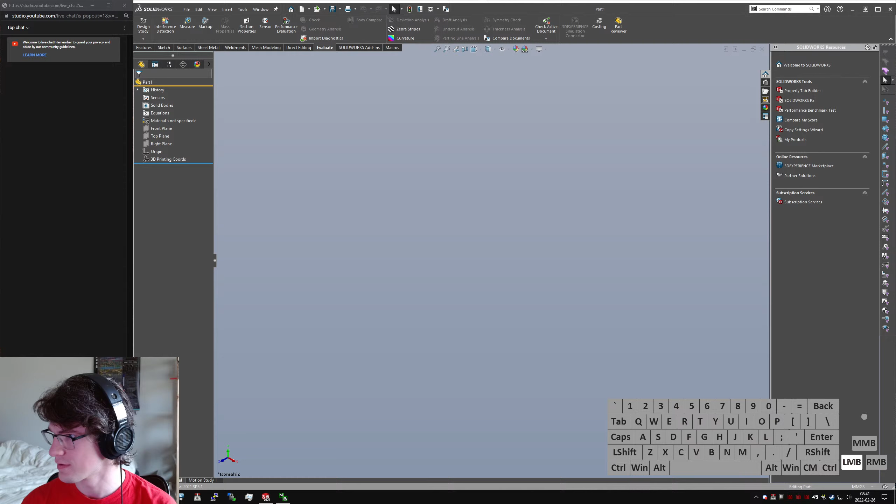Da da da. Monolith challenge. Oh, I can probably just... can I do it just from the browser? That'd be rad. Hey, check it out, cool.

Okay. That looks terrible though, one sec. Oh goodness, properties, here we go. No. Transform, here we go, reset transform. Oh whoops, I goofed the URL. There we go, okay. Transform, edit transform.

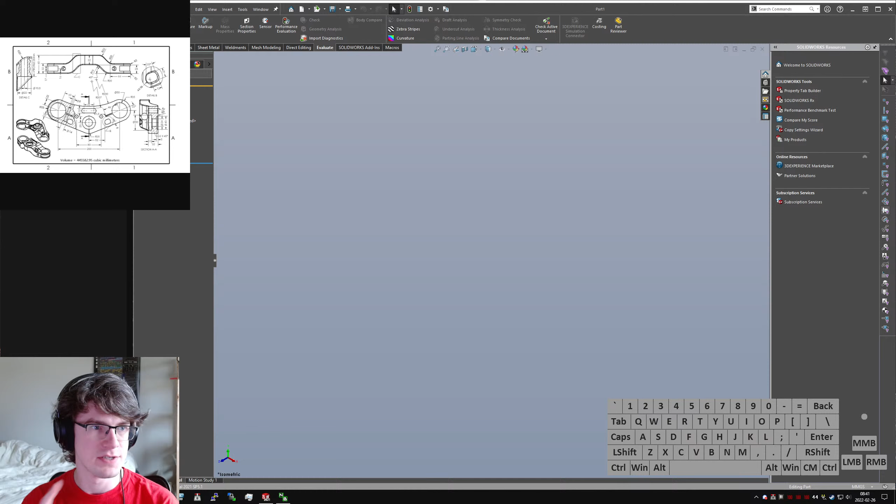Looks good to me. I'll drag that up in the corner there, make that big enough to see. Okay, I should probably get that up in a window for myself so that I can see it.

Okay, so we've got roughly what looks like a motorcycle or some sort of two-wheeled vehicle triple clamp here. I'll pull up some examples just to show you what I mean. It is specifically a structure that sits at the top of your suspension and holds your handlebars, it holds the top of your front forks, it holds all the little bits and pieces and odds and ends that serve as most of the front of the suspension of a motorcycle.

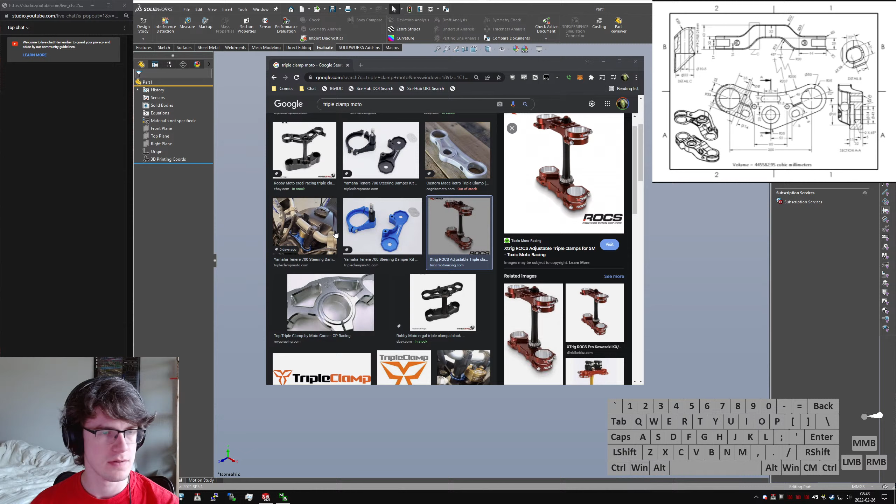I'm pretty sure that's what this structure is, based on sort of the two tubes that it's clamping onto. There's really not anything else it can be. So, I mean, yeah, let's get to it.

So let's see, we've got a... let's just start with the top profile first. We have an overall height, 60 millimeters. I think I want to put my origin probably at the base of that. No, let's put the origin at the top because it's the top surface that we're working with.

Oops, lines do that sometimes. Oh, I must have moved. I've changed my defaults a little bit at work recently, so now none of my shortcuts are in the same spot. But we're just gonna quickly trace out this outer profile. I was kind of hoping it'll give me a 180, but I guess it doesn't want to.

As an example, when you trace off a line vertically and drag off it, Solidworks will give you a point that matches 180, so you can quickly give things that are in the right spot, even if they don't have the relations yet.

Let's add this bottom curve. Oops, select both, Alt-A, make them tangent. They're all goofy, that's fine. And while we don't have relations here yet, that makes it a lot easier to sort of drag things around and make them really work.

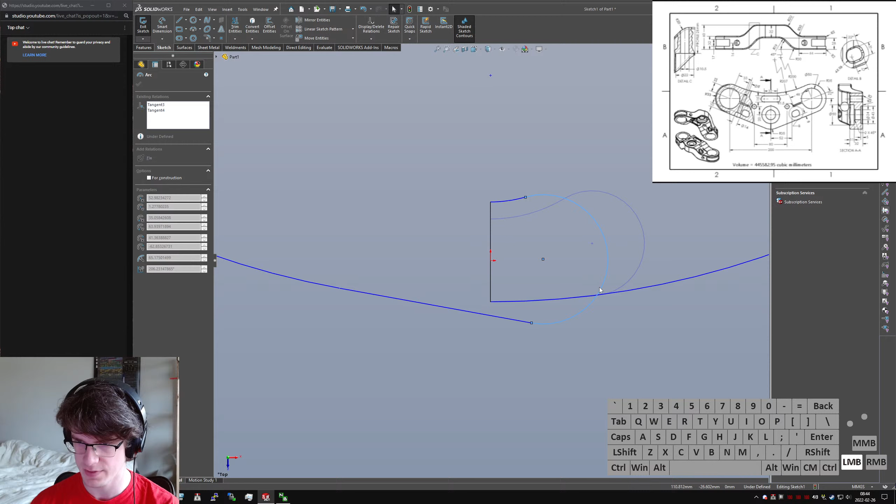So let's get some controls on that. Make that tangent, and is 35 millimeters in radius.

And this guy over here, there isn't actually a dimension on the drawing for this one, which you can suss it out based on how you've got that 22 degrees on the upper right end. Like this 22 degrees right here is like the only...

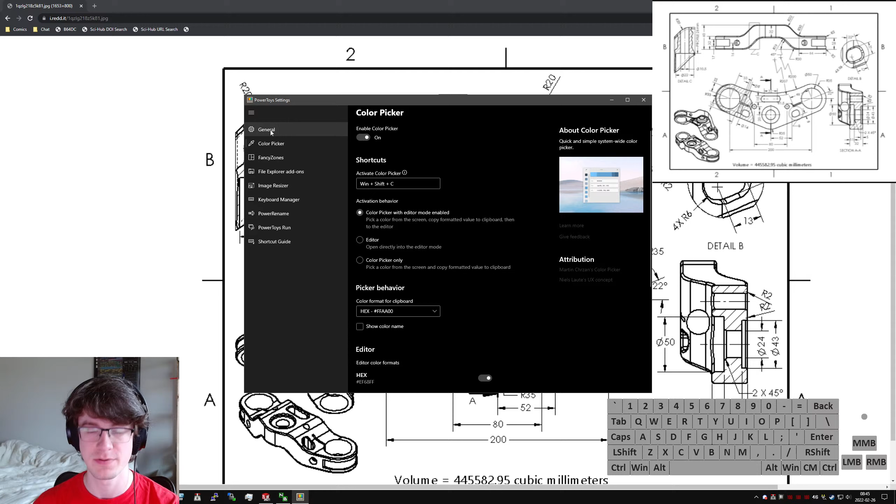Oh hang on, I just realized I have a perfect tool for indicating... oh, where is it? Where's the thing? It's in here somewhere. Power Toys, if you don't know about it, great tool for just doing weird stuff. It's a great pack of little... where is my mouse? Where's my mouse controls? There's a way to get it to, on double click of control...

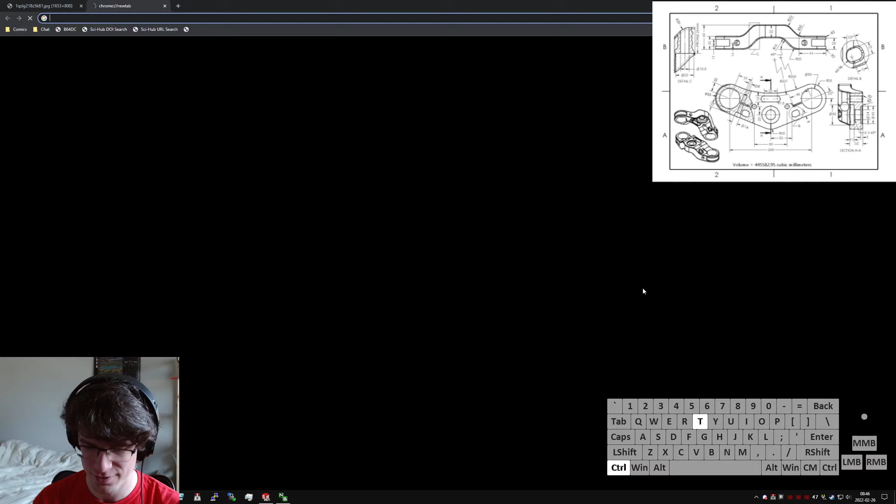Am I on like an old version or something? Yeah wow, I'm on version 35. Okay, that's old enough. I'm not going to do that right now, but... no, actually I should, because it's a really good tool. Power Toys, release page, Power Toys.

Dunk, let's get that out of the way. Downloads, installers, Power Toys. Come on, run, thank you. I agree, yes, install, yes.

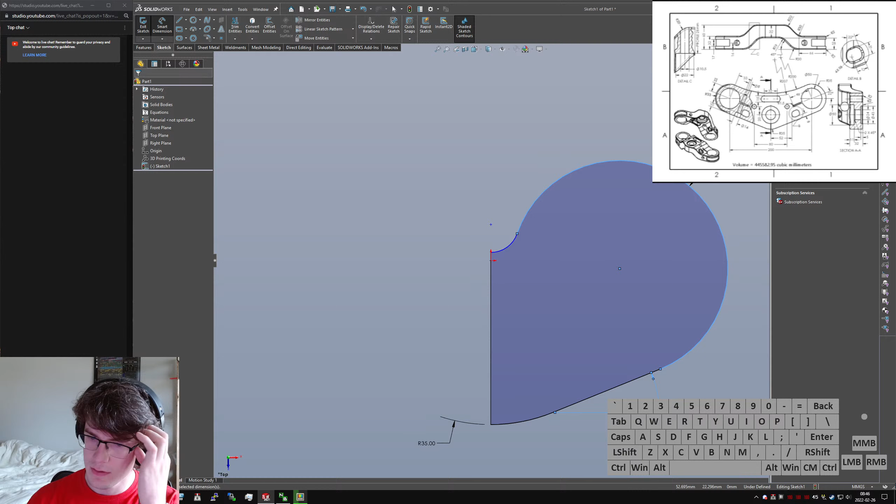In the meantime, we'll keep modeling. So I know this is roughly 22 degrees. I know that the OD of this part, get that out of the way, is also 35. Interesting, I wonder why it's the same on both of them. 35.

And we know we can bring that up here, and this radius up here is 200. Now with this, pick that, pick that, pick that. Right click, drag, symmetrical, part's done. And I just set this to 200 per the drawing. There we go, there's our profile.

I'm not going to fill anything else out yet. That's a lie, I'm going to do the big holes, the big bores, because those are pretty... and I could have added that in the symmetrical as well, but I didn't. Whoops. Have both of those.

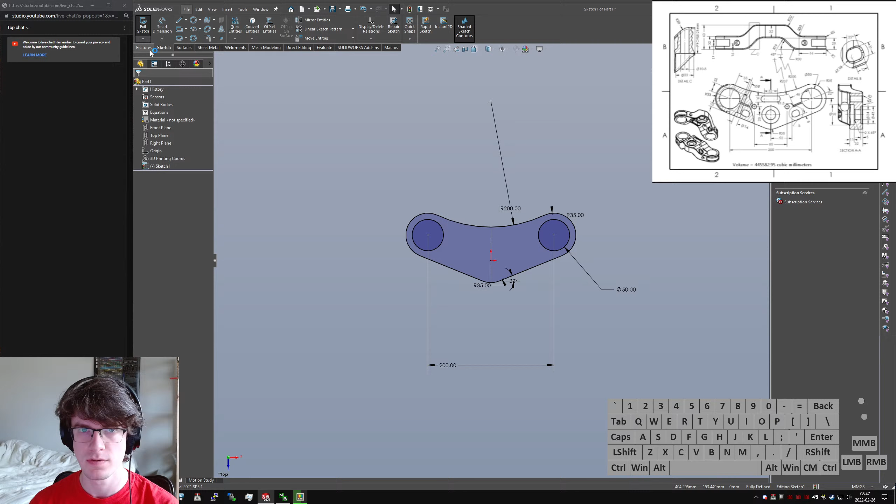Alt Q, features, extruded boss. I'm going to extrude down, so that leaves me with an origin that's at the top center face. Per the drawing of 60 mils thickness, put that down. Cool, there's our basic shape. Power Toys is still updating. Let's do an extruded cut from the front now.

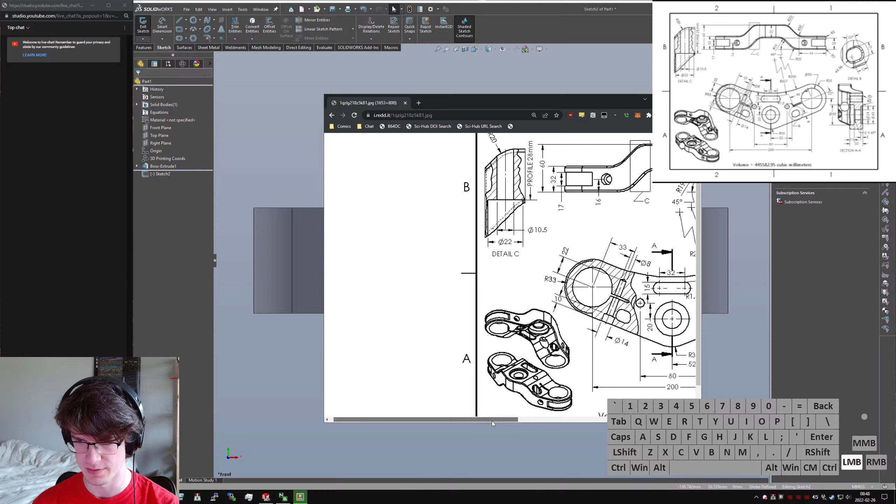Because that's sort of the next major thing we need to start cutting away the profile, is getting rid of this mass here. Which leaves me in a bit of a conundrum, because I'm not actually sure how all of this is defined. This isn't super clear.

30, 30, 20, 19, okay. 28 millimeters, okay. I think this edge starts at the 66 millimeter point. But if it doesn't, I've got no idea. It looks like it might also be 32 millimeters thickness, and we'll just double check that at some point.

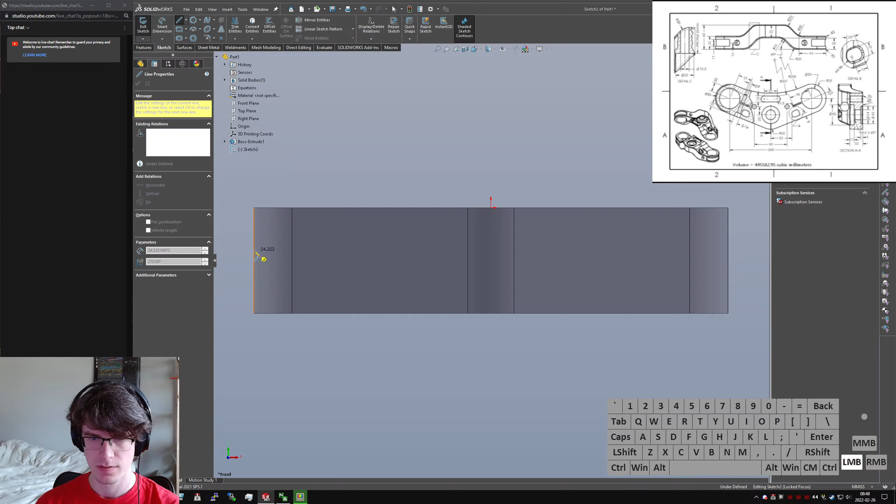I kind of want to try the new open edge cuts, because I don't do that very often. We'll do this again with the symmetrical tool. Whoops, a whole bunch of things.

Okay, 45 degrees, and it's not indicated on the top, which means it's probably parallel on both. 45. Is Power Toys done yet?

Yes, it is done. Is it running the new version now? It is! Check it out. Mouse utilities. Find my mouse. Yeah, there we go. Now get a little mouse highlight. Awesome. Okay, so now I can indicate stuff clearly.

This 22 here, and I wish they wouldn't add a white overlay, because it clearly does put a little bit of white over it, but eh. Oh, maybe I can customize that. I totally bet I can customize that.

Mouse utilities, find my mouse appearance and behavior, spotlight color, spotlight radius. Let's do like 200 because I need a little bigger for big screen. Overlay opacity. Ah, but you can't make it. Ah, hue saturation value. You can't make it transparent. No. That's annoying.

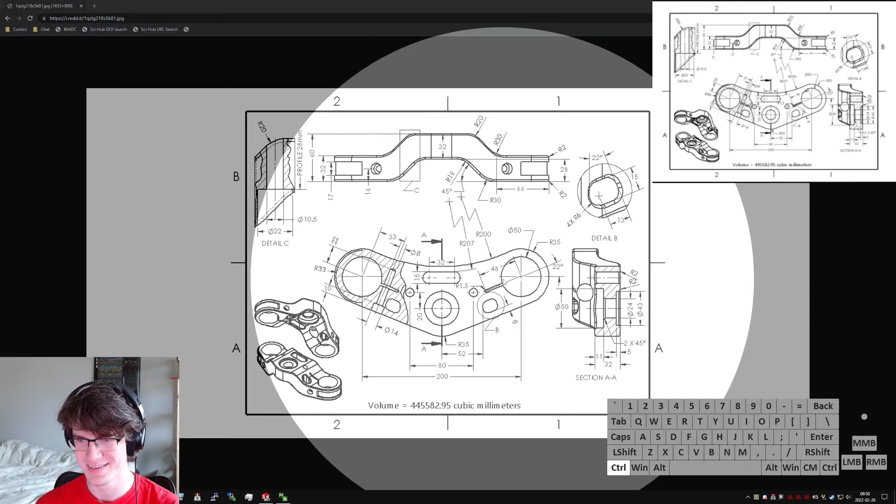Okay. Oh well. I'll just put this up here in the middle. Well, can I, like, Alt-Tab efficiently? We'll see if I can Alt-Tab efficiently.

Okay, so 45. We know that we've got 66 millimeters length here. Looks like these are parallel, probably. Off the top surface, we are 32 millimeters. Off the bottom surface, that's a little sketchy. I'm going to add a line there.

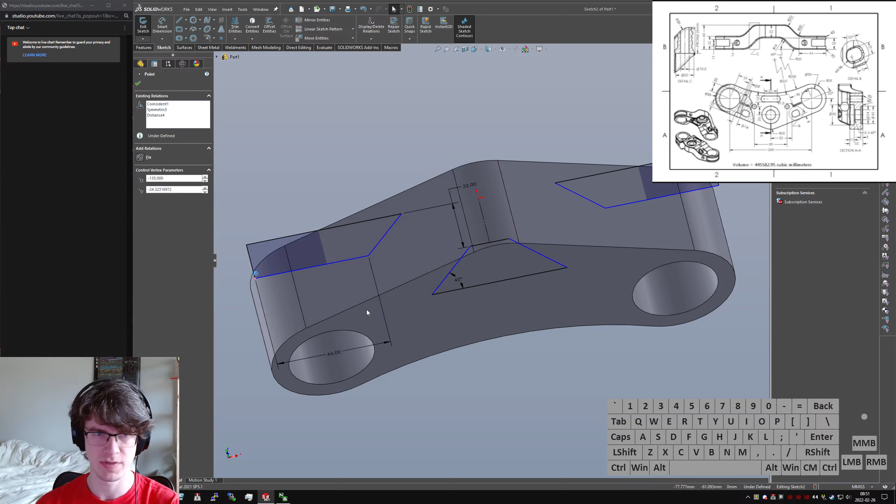It's important to control your relations as well. This is coincident with that line, which is a little iffy, but, oh, better yet, I can tell it to be coincident with that face, and that way it'll always be cutting off from the bottom rather than having to specifically refer to that line. This one is also difficult because I think it's coincident with like a non-existent edge that doesn't really exist. And this one is coincident with this edge, which I don't want. I want it to be coincident with this.

Okay, that's probably good enough for now. Add this 32 thickness here. And then we don't really have a good control for how thick this is. But if I set this to 32, I would... No, dang it.

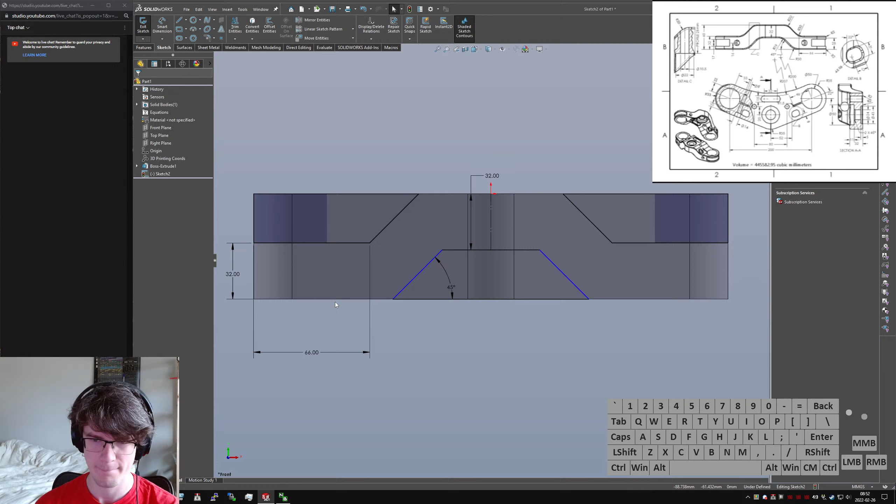Oh, no, I forgot. It's because there's a fillet, too. I'd bet almost anything that this is also 32 millimeters thick. It's sort of the only one that makes sense. So we'll do an extruded cut through all in both directions because we're cutting from, if we look at where the sketch is, it's on the front plane.

Which is going to have to cut in both directions to get all the material off. So now we'll do some fillets to get our profile because those fillets are actually important to exist beforehand, I think. Well, maybe not.

Let's do these guys next, these little cutouts. So we've got 48 millimeter depth from the center of that bore. And looks like it's right on center. And it's 1.5 millimeter radius, so 3 millimeters width. I probably would have dimensioned the width, I think, even with the radius. Yeah.

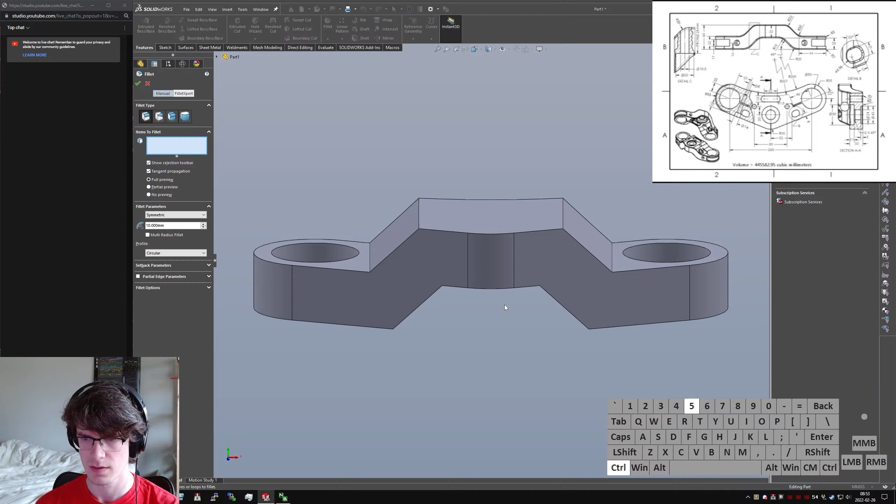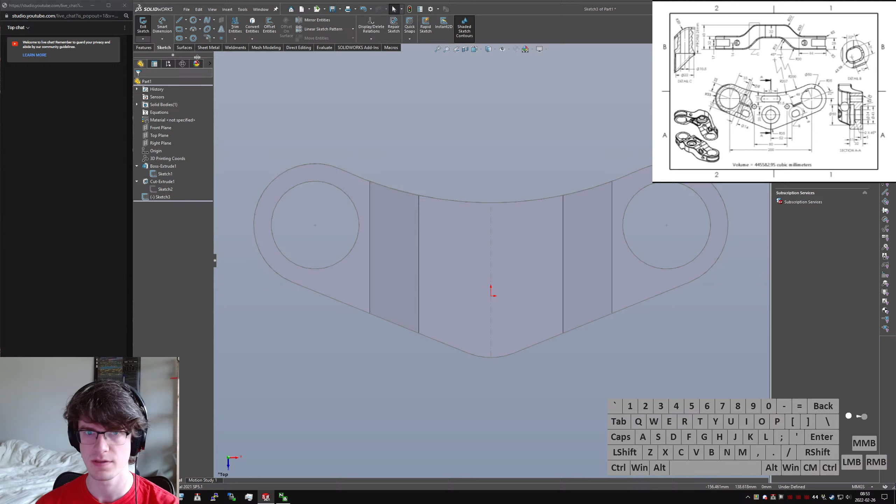Let's do no fillets yet. Oh, I didn't change this to be extruded cuts yet. I have a signal message to myself with all my new shortcuts, but I haven't changed them here yet. Let's do top plane. And I'm just going to do this with... ooh, I should reference the sketch instead, actually, since that's sort of the critical defining feature here.

I can make this not collinear, sorry, parallel. Make that 48 millimeters long. And just from a design intent perspective, I would always say that as I'm defining a gap, I'm not defining the radius on the other end. The radius is almost even incidental, except for stress relief in there, but it's still under compression because of the way the structure is designed, so not really that big a deal.

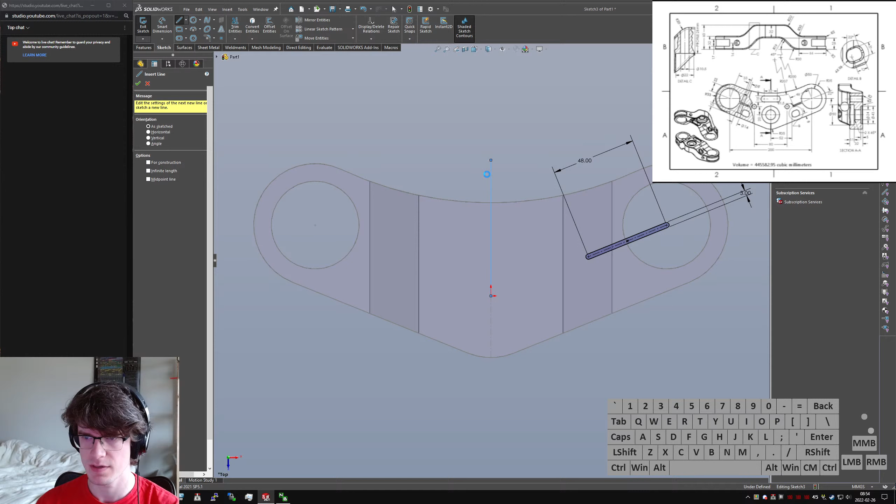I'll do the same thing with mirroring. I'm pretty sure it'll let me mirror this easily. Yes. Technically there's a construction line as part of the slot, but the way Solidworks treats slot entities, it's one contiguous thing, and so you can still select one construction line and let you mirror things. So we will do an extruded cut

through all. And if I do this first, then it also gives me the opportunity to look at, let's see, this bore is what we care about next. Does it say, yeah, 16 millimeters up from the base, 33 over from the end. And that's got to be tapped. So we will do a hole wizard.

Because this part is symmetrical across X, I'm going to use a 3D sketch. I'll do it once, do a stack up of one, do all the features I need, and then do one mirror at the end, so I don't have a whole bunch of separate mirror features with their own mirror silliness.

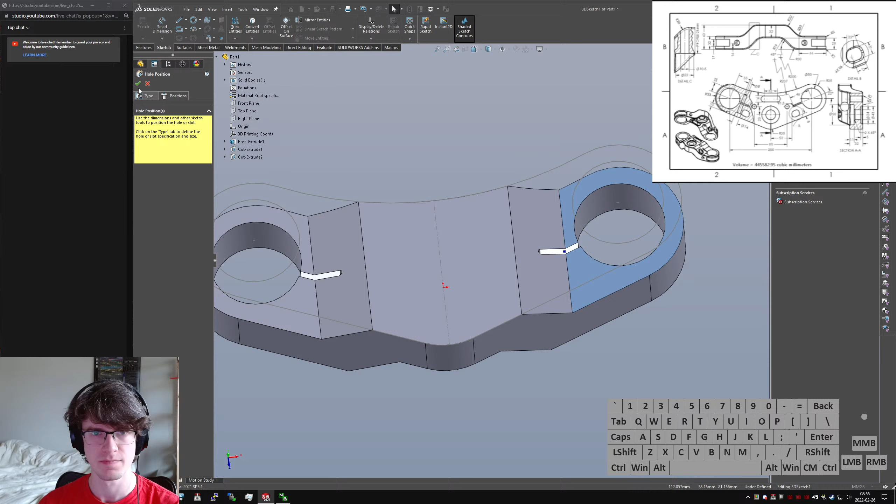So type is threaded. What's the clearance? 8 millimeters. Quick check on M8 socket cap screw dimensions... images... M8, head diameter 13. So that is definitely designed for an M8, which is kind of a big clamp bolt for these. They only take on the order of 10 or 20 Newton meters for clamp bolts, or pinch bolts as they're usually called.

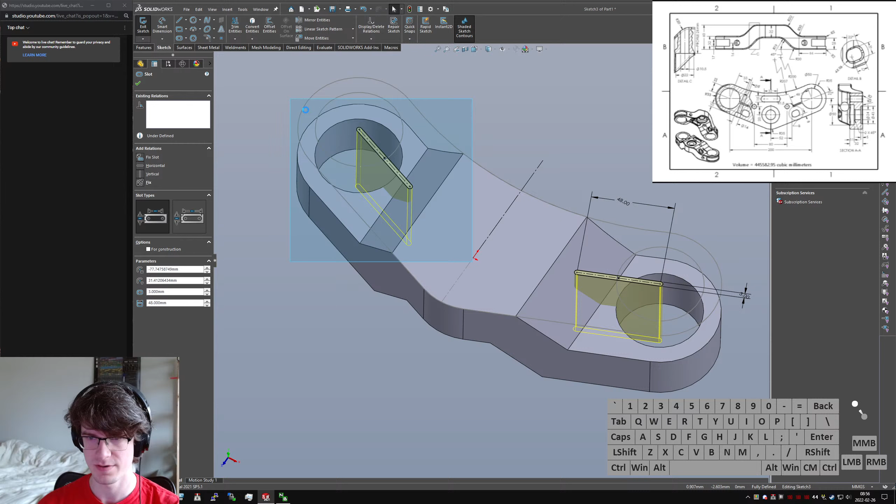ANSI Metric. Straight bottoming tapped hole, not up to next, but merely blind. And I am not going to do this—oh hang on, no wait a minute, I need to do this for the drawing. I can't just engineer this correctly. I'll get rid of this while I'm here too, I'll mirror everything later.

Ooh, I do need the fillets though, because otherwise I have to fillet that twice. So we'll do that before this first cut extrude, or rather right after it. So we've got 30, 30, 20, 19. Okay, at that sketch while we're up here. We'll do a multi-radius fillet, which should let me add all these fillet features in one go—which isn't the most necessary thing, but whoops, wasn't done adding fillets yet.

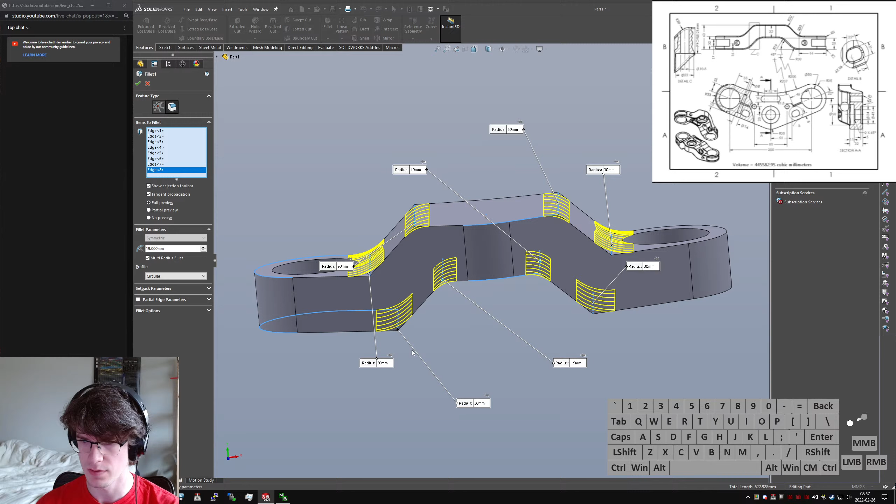Nope, not that. Let's see, 30, 30—no, this underneath one is 19. This top one is 20. Is that right? 19, 19, 20, 20, 30, 30, 30, 30. Cool, okay, fillets, cool beans.

Oop, I didn't do keep surface. We can check his model as well to make sure that's the case. Yeah, that's one contiguous surface, so it doesn't change there—it would show hidden lines in the drawing if it did. So we can go down to fillet options and say keep surface. There we go, straight lines. Now our cut extrude cuts through just fine.

And next up is the hole. We are dealing with a counterbore to a depth of 22 millimeters past that, and that's 35, so overall depth is... oh, I'm gonna have to do this with a custom hole, or tell it to put a counterbore at the front—it's the easiest way. Naturally I'd want to design this with SolidWorks tools for saying make this a hole with threads in it so the callouts come out right, but... yeah. 22 from a 35 outer radius is going to be 57.

I almost want to do advanced hole just because that'd be easier, but no shortcuts. End condition, we're dealing with where that cuts off. Not hex bolt, but socketed cap screw, M8, normal, show custom sizing. We want this to be... well, I have to do it to those dimensions. And that goes to 10 depth, which is a little more than usual. He doesn't dimension that endpoint—I mean we can assume it's a nominal 118 because he was probably using SolidWorks. Probably using SolidWorks, but depth is going to be 55.

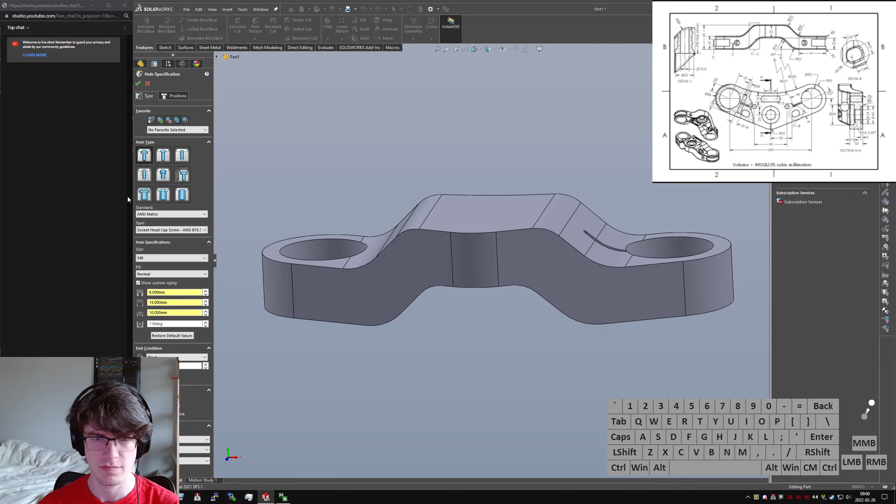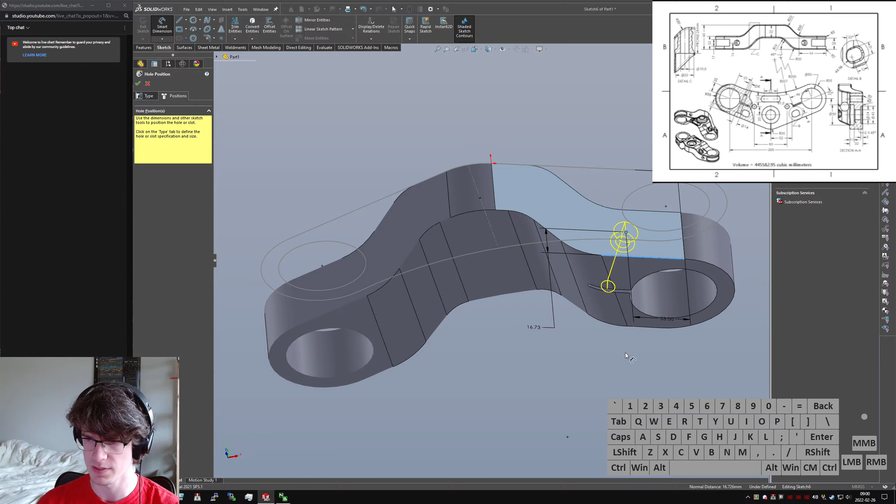Positions—just pop that guy here. Do I want to use that reference edge? I don't think I do. I think I want to show this sketch, define that relative to... tell you what, let's convert that, make a construction just so we have a reference, and then we can reference the midpoint of it and say 33. And because we cannot reference surfaces in sketches, unfortunately, that'll just have to be 16 for an edge. Not the biggest fan of that, but it is what it is. So now we say okay, and now we're geometrically accurate.

Cool, so next up is—this cutout's going to be really weird when we section that through there. I think I want to do this, let's do this slot next. Or, oh no, I can do...

What is the deal with that hole? What is that hole's deal? Does it ever get a called out radius? It says they're 80 millimeters apart, and it looks like they might get a counterbore or something. Oh, they're not fully dimensioned. No, they don't have the diameter, they don't have, like... I don't think they have a call out.

How long have I been going? 20 minutes?

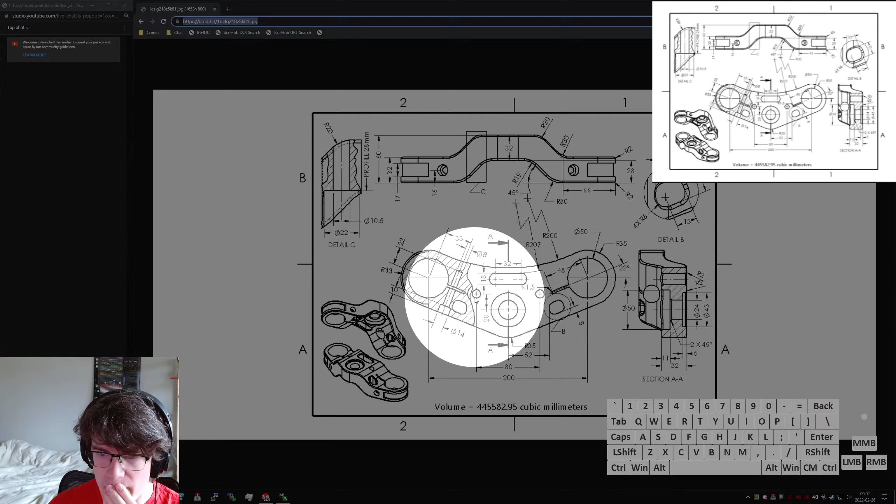So I'm specifically worried about this little hole right here in the center. Those aren't defined, which isn't great. But I said I was going to do it, so.

Let's see, Extruded Cut up next, top plane. I'm going to try and reference this because that's the origin, and that's what matters. I can even hide the solid body. So we've got a vertical line here, perpendicular to that, and we come back down. This is parallel to that.

It's 8 millimeters away. I think it's 8 millimeters away. Is that what the drawing says? Yeah, 8 millimeters, and then 13 to the center of that radius. 22 and 15. Okay, which means we can just leave this vertical.

But it means we need to have the... since this is defined from that edge, we need to have the radii built into the cut section. Oh well.

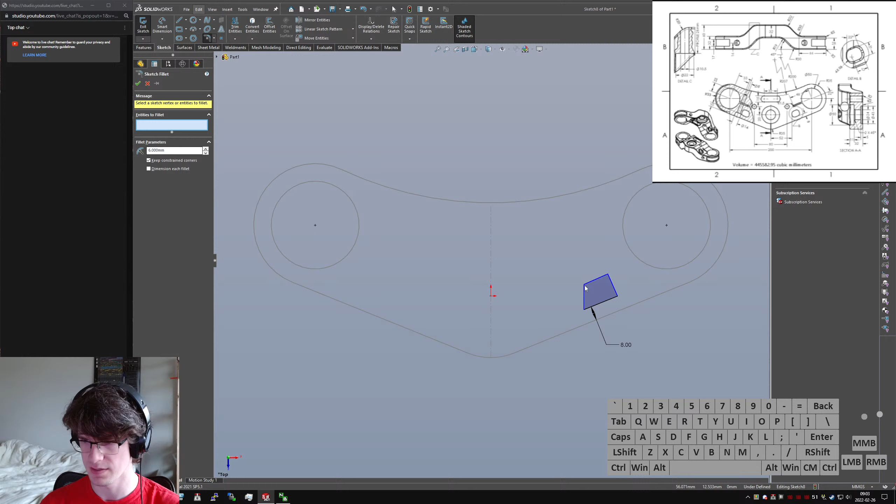We'll remove that and put it on the far side just to get things out of the way. So I think that was 13 and 15.

Ooh, they're not parallel. 15, I think. Looks about right.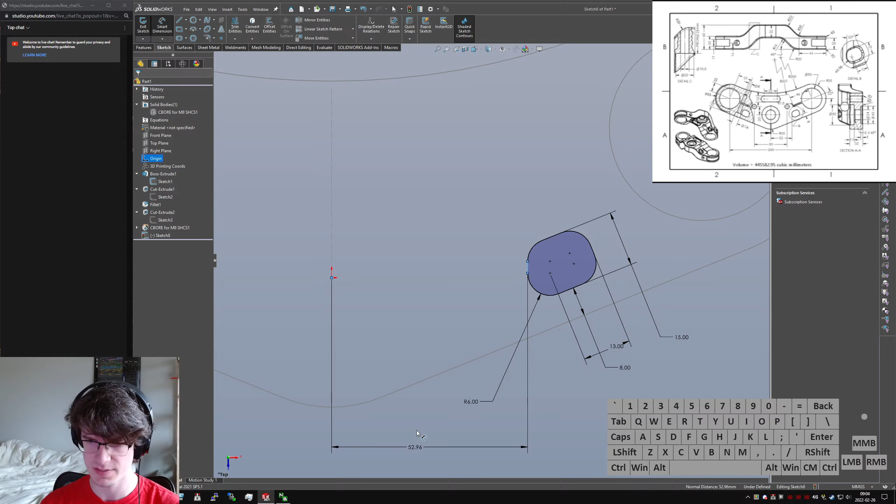So we've got 15, 22 degrees. That's fine. Having this one be perpendicular to the sky puts everything in the right spot. And then we want it to be 52 off center line, so I'll just do that by grabbing the origin. Better than grabbing the sketch wherever possible. You want to limit your external references if you can.

So now we unhide it, say Extruded Cut. I should show off this trick because it's kind of interesting. If you hide a body when you're doing a cut, Solidworks will just assume that it's not there. So if I say up to next, like go all the way through, it'll say the intended cut does not intersect the model. You can control what bodies you're applying cuts to just with visibility in the graphics view, which is handy. It's weird, but handy.

I should save this too, actually. Reddit, Clamp, 2022-02-26.

That's one of the cuts. What else do we need to be mirrorable? Ah, we need this. How does that get clarified?

Okay, 17 millimeter thickness, and 33 millimeters, so... and it's vertically aligned, which is a little strange.

I probably would have aligned it to the... like, instead of having it be vertically aligned, I would have aligned it like this. So that, there we go. I would have aligned it this way so that you minimize the material you're removing and just save weight, or just reduce stiffness on the exterior. On the other hand, this is probably still thicker than it needs to be, so.

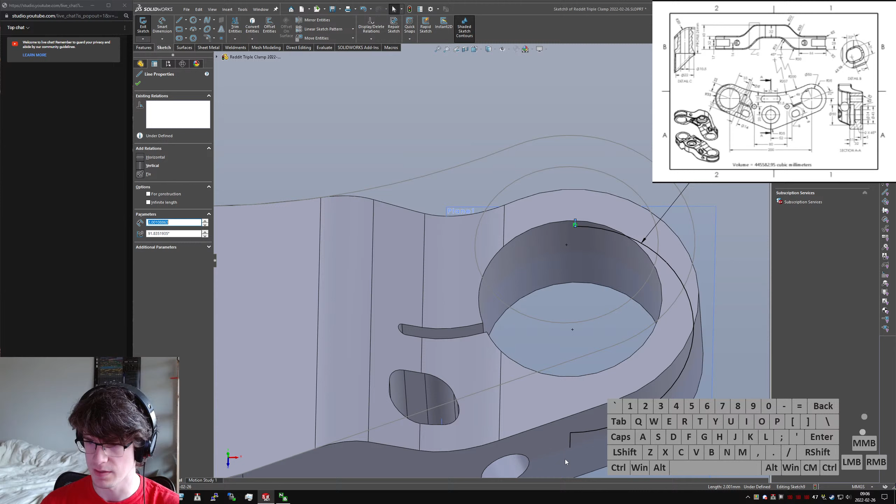Coincident, centric, 33. We'll make this guy, no matter what, collinear.

Features, extruded cut. Whoops, why is that not letting me do... oh, because it's... well, let's just convert this face.

Convert entities, I'll just trim away the rest. Sometimes it does have to just be referenced to the... ooh wait, no, I can convert the sketch instead. I can convert the whole sketch.

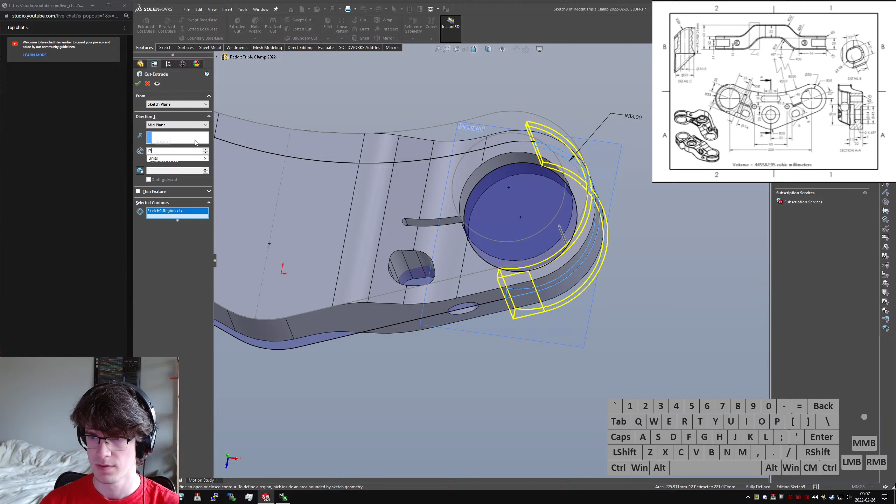And then I can say extruded cut, midplane, selected contours, and then I can pick just that one contour. This is a trick I discovered recently that seems really handy. You just convert the whole sketch and tell it to only care about this contour surrounded by these entities. You don't get any weirdness when you change other entities and it adds or removes things in the sketch. You're just always referencing that section.

So let's, whoops, don't need another sketch there yet. Hide that, hide that. So now I think we're looking at all of the independent features we need on one side, so I'm going to go ahead and mirror those. Go doot, doot, doot, doot. Looks good to me. Say okay.

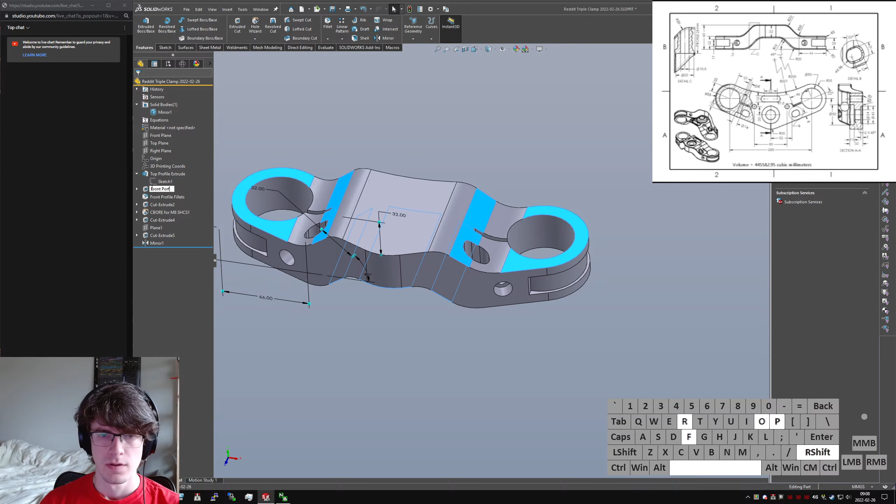Sweet, let's do some quick cleanup and naming. So, profile fillets. Top profile extrude. Front profile cuts. Clamp gap cut.

Right, socketed cap screw, C-bore, hole. We've got the clamp stress - we'll call this the clamp flexure relief.

Because if I'm looking at this model right, when you clamp down on this bolt, you'll want to bend this whole bit inwards, which you've got a lot of material for that little bit of steel to move, assuming this is made of aluminum. It can probably kind of do it, but it's still not how I'd go about it if I was designing a clamping fixture.

And this is the exterior clamp relief cut. And rear clamp features. This one is, whoops, we should name the plane too. This is the clamp midplane.

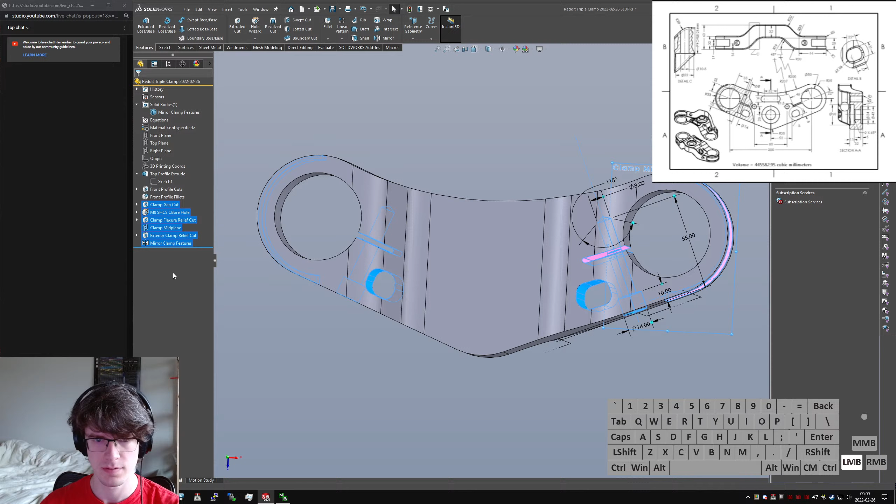Now, clamp features, which successfully grabs everything that's clamp related. I think there's probably some chamfering and things to do later on. Well, I guess maybe not. Maybe it's good as is.

Okay, so now I need a really complicated hole that... oh, those are counterbores from the underside. What?

Oh, hang on, that's totally called out. I'm dumb, goodness. Thank goodness, actually, because I was worried that those holes just weren't described at all.

22 profile, 28 millimeters, so I guess it's just 28 millimeters in the bottom. I can't think of any other way to describe that, so that's what I have to go with. Yeah, that's what this weird edge is right here. That's the counterbore, and since we know we're on center line with this bolt because that 80 millimeter diametric dimension is out, and we know that's 60 millimeters up from the bottom.

We know that we have to have cut through right there, so let's do that. That means one more feature to add to the clamp, which reinforces that it's probably a triple clamp because those bolts would have to go up through the bottom to grab the bottom of your handlebar clamps, or what are they called? Handlebar clamps. Yeah, handlebar clamps, handlebar riser clamps, that's what they look like. Normally they bolt in from the top and you bolt through them, but there's some other styles too. At least on dirt bikes, it's a pretty standard 2-bolt pattern, I think, with M8s.

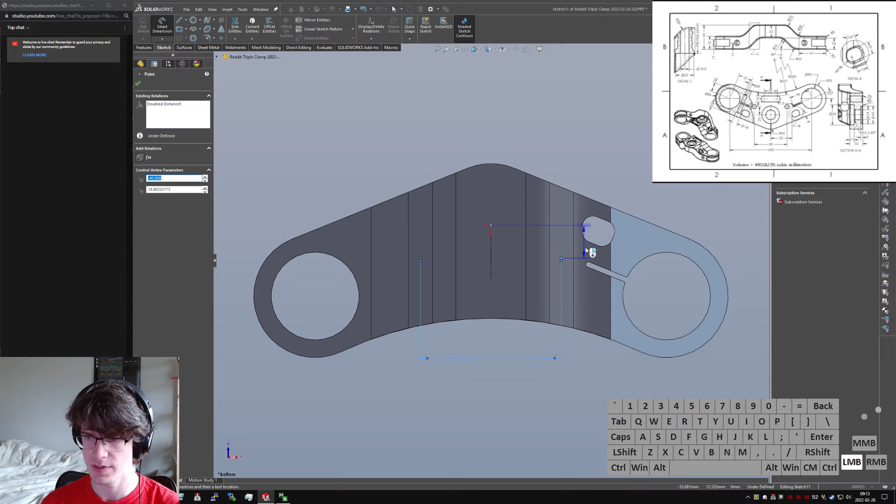And the surface is this one on the bottom. We'll just put it there, bring it over. I'm going to add a line here so that I can give it that... whoops. If I was doing this from a perpendicular view, it would be a lot easier. Make that 80. If you had a center line, you can do things diametrically, which is handy. Add that point, and that point, say 20 mils. I think that's what the drawing gives.

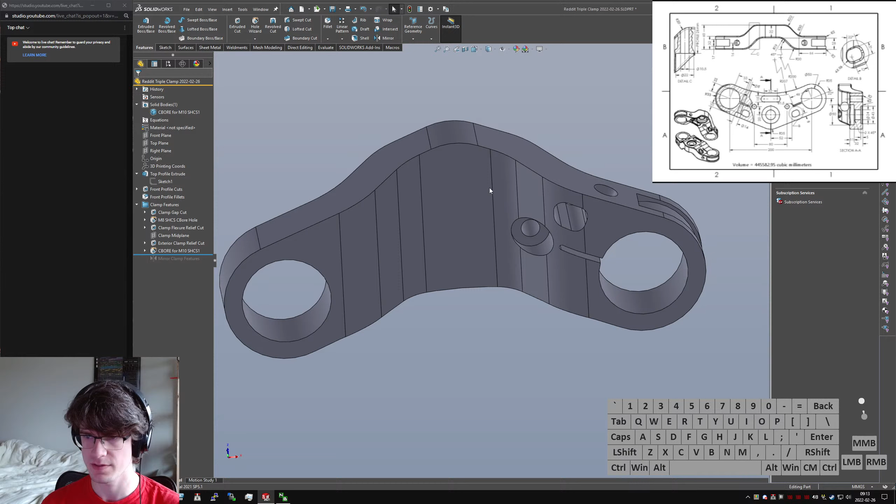Yeah, 20 mils off center, the big guy. And that looks about right, and gives us the right amount of cut through. What's that look like in profile, actually? Let's see... that seems about right, honestly. If I do it the other way around, and say make this 32 in depth, that looks deeper than it is in the drawing. So we'll stick with 28 here.

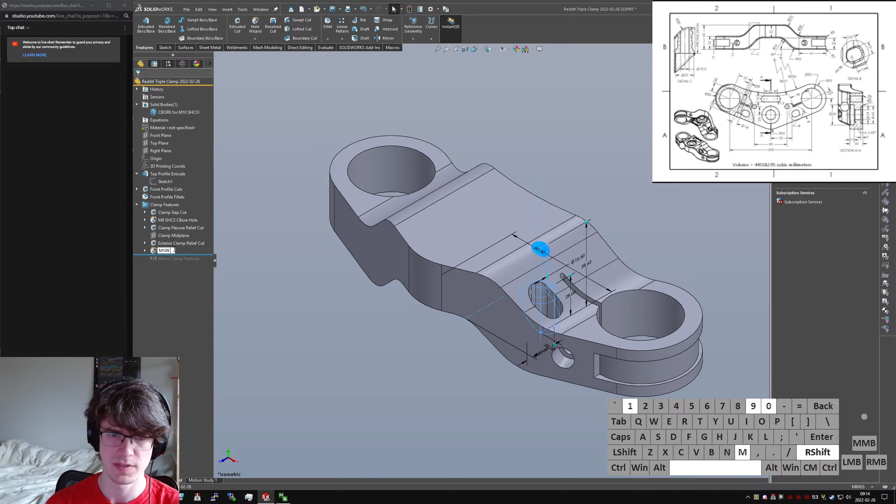Call this the M10 socket head cap screw, underside C-bore hole, and add that to the set of mirrored features. Do a quick save. Looking good so far.

Okay, next up is... oh man, I am not looking forward to this. Oh no, never mind. Did he... is that filleted? What is the deal there? It looks kind of like there's an exterior chamfer on this. But I don't know, there's a lot of specific chamfering that's not really called out. Unless those are radii on the exterior. They are radii on the exterior, and the way I can tell this...

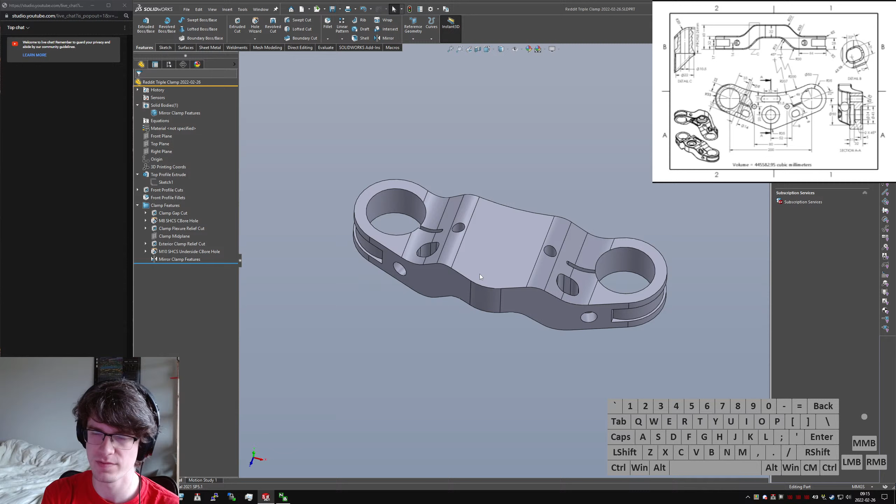Hang on. So we can see in this view that he showed tangent edges, but he didn't in the profile view, probably because it would have looked too busy. Yeah, those have to be fillets. Oh man, that'd be such a pain to machine. You could never have that on a production part. They would have to be chamfers, and you'd have to specify that handwork is okay or something. I mean, you could tell him to CNC it, but with the part designed this way, it's probably designed for something that wants to be kind of cheap, so it's probably done from a casting first, if I had to guess.

We'll have to save all that to the end, that's for later. Let's do this top hole now. So 43, 24, depth is 5, and then 11 on the back side. I think advanced hole is actually the right tool for this for the first time in a long while. I don't really use it all that often because it just isn't something I really need.

Let's see, and add one more. So this is going to be a far side counterbore. And we've got, oh, we don't actually have a chamfer. But it looks like we've got a fillet.

Is it chamfered on the inlet too? But it doesn't show up in the model. Oh, that's chamfered on the bottom backside? Yeah, okay, I guess that's 2 chamfers. It's really hard to tell, that top surface is small.

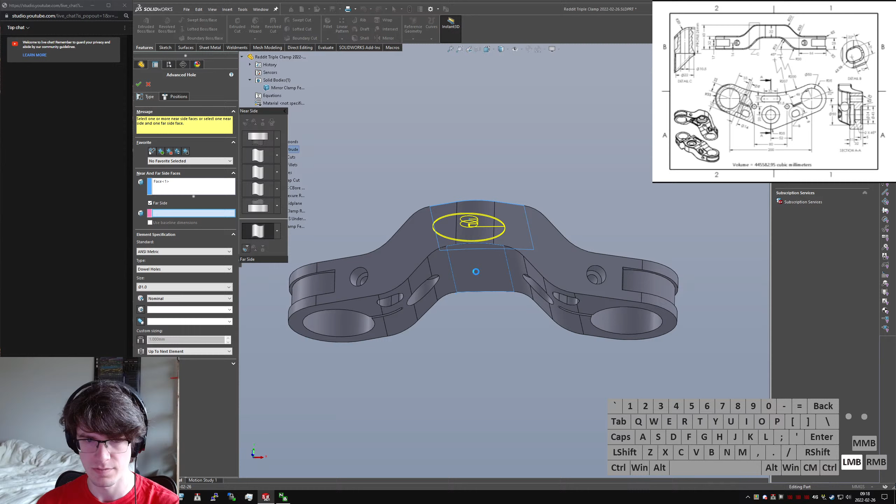Let's see. Okay, so we got a far side, we got a near side and a far side. Top one is going to be asymmetric. Counterbore, I'm just going to custom size it, it's going to be awful. 43 and 5 mil depth.

Oh, hang on, I can remove elements from this. Near side countersink. I'm not going to put a countersink here, and maybe I'll just make this a plain hole. Maybe that's easier, because then I could just specify my custom sizing a little easier. So this is going to be, was it 23 and 5? Or 43 and 5? 43, 5, and 24.

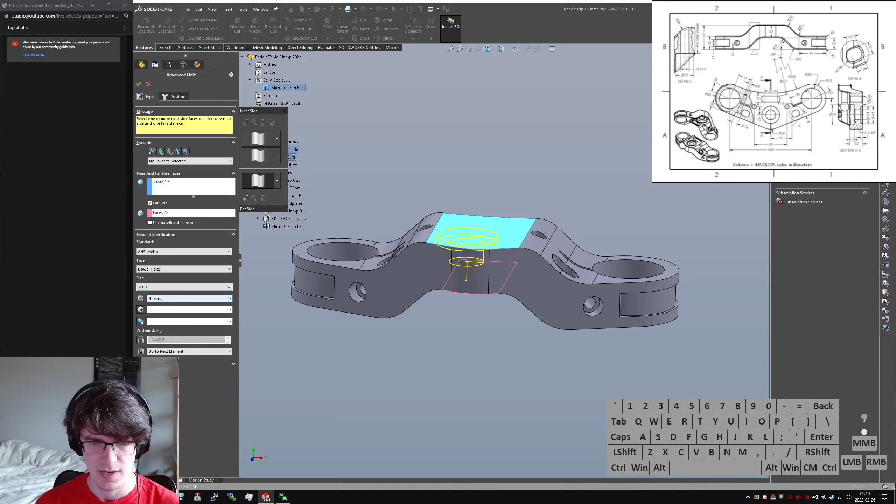Okay, so now if you go into section view, it's still jacked up. Awesome. Okay, maybe advanced hole isn't the right way to go about this, because it will always screw up stuff like this. I hate it, it's just so bad. Okay, revolved cut it is.

Front plane, show the sketch. I guess I do kind of need the body to be shown, but I can at least develop the whole sketch down here first. So we've got— whoops, hang on, wrong side. Drag this out to 43. This one out to 50. Flat edge to flat edge.

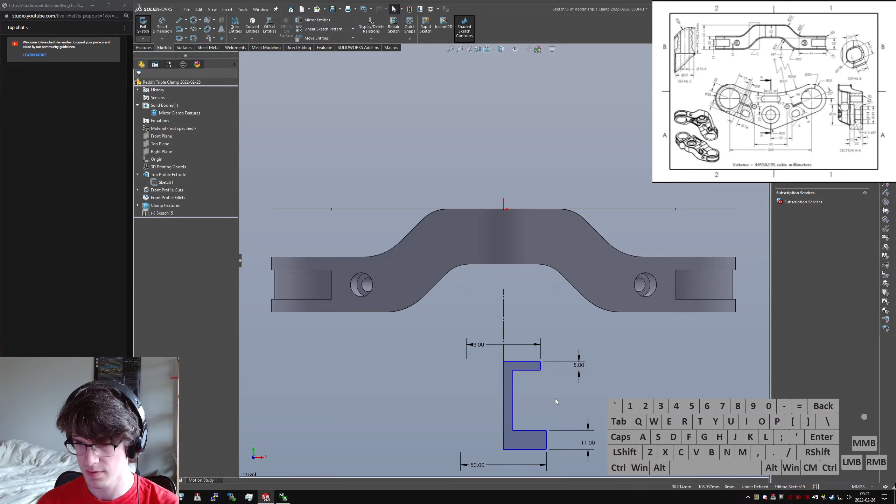5. Flat edge, 11, quick check of that center bore. 24. And 24. Ooh, I actually don't need to show this sketch here because I could just grab this, make that coincident, and there's almost all that defined.

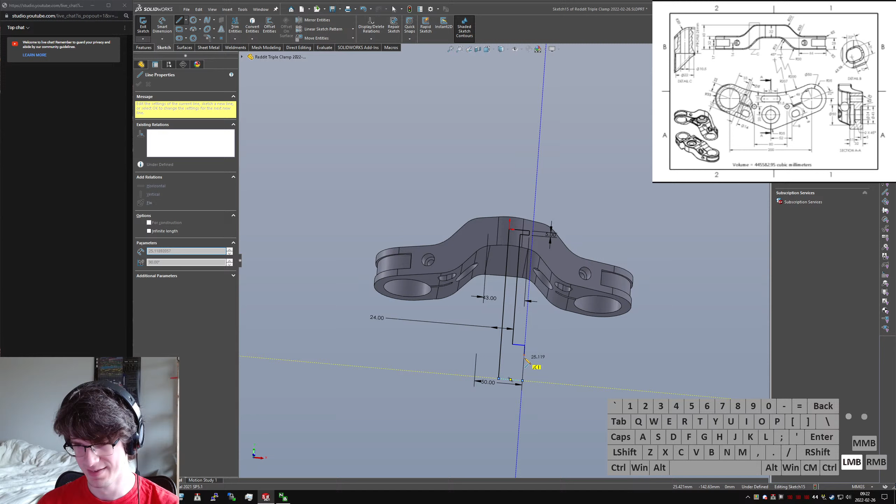And I'm realizing now that I can't just have that be that, because this has to go all the way down to the bottom face to make sure that I cut all the material away, because this model is not great. I can pick this point and say I want you coincident with that surface. And then I can pick this edge and say be 11 millimeters deep. And I'm going to pick this one and say be coincident with that face, because it just is.

Because I need to reach further, but I don't have an easy way to define that. It's the nature of dealing with models this way, holes don't like being near fillets. I would maybe put those fillets at the end, but it's just kind of messy when you have things that overlap with fillets that way. But we can call this revolved cut now, and it should work just fine. Pop right out.

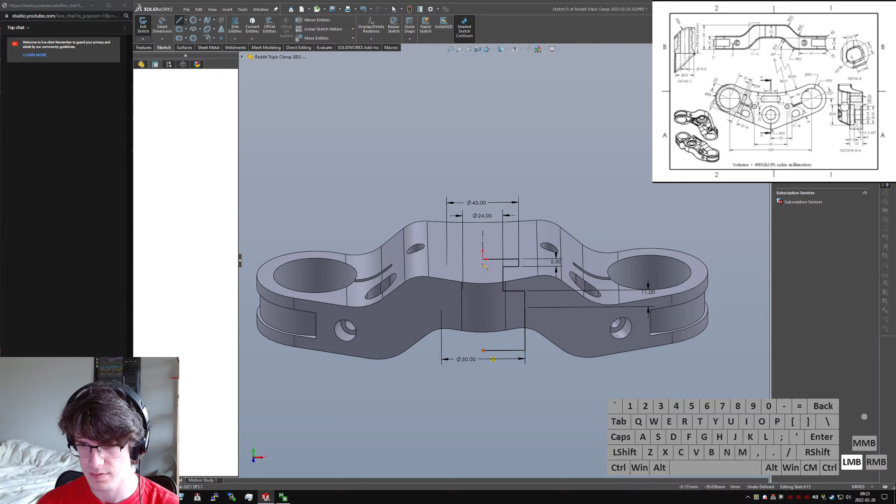There is— hang on. I'd like to have it all be visible at least. Put that up in the right spot. And we can actually have the chamfer here too, or one of the chamfers. 2. I'm assuming that is a 2mm chamfer as marked. It's kind of hard to tell because there's a lot of other stuff that just doesn't really make sense here.

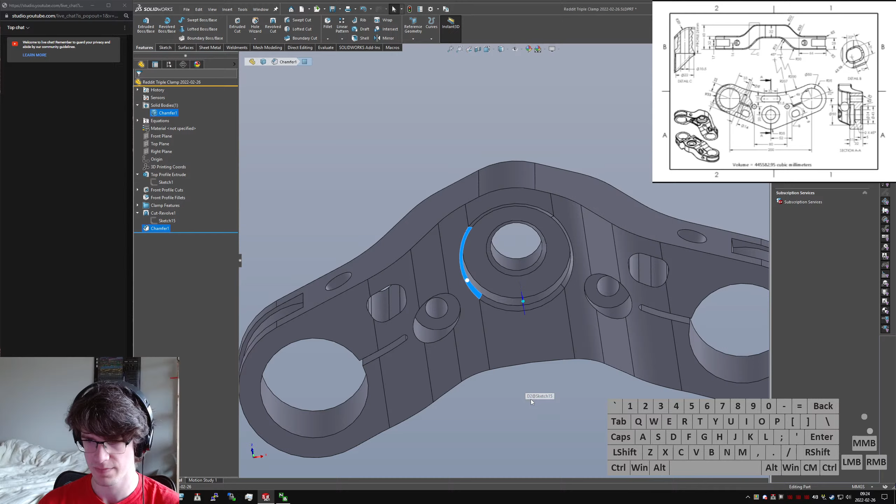And I could run into trouble in terms of this not actually being like a 45, maybe it's one of these other styles of chamfer. I personally prefer, when modeling things for 3D printing, to use equal chamfers, but there's just no way to tell what's used. Well, it does say 2x45, but I don't know. What happens when I flip direction? Not much. I guess I just gotta assume that it's right.

Okay, that's most of the features now, I think. That leaves us with just this quick slot counterbore cut in the top. I'm just going to do that with a cut because it's easier. We'll do this with a center point straight slot.

Grab that, grab that, grab that. It is 15, 32, and 7mm off. 15, 32. Its dimension is a radius, which is kind of weird. I'll add an extra line here so I can control where it is left, right. But I would prefer to do this, at least when dimensioning and modeling it, as a distance between a line and an arc like that, instead of defining it as a radius. Just makes more sense in my head. Extruded cut, up to next.

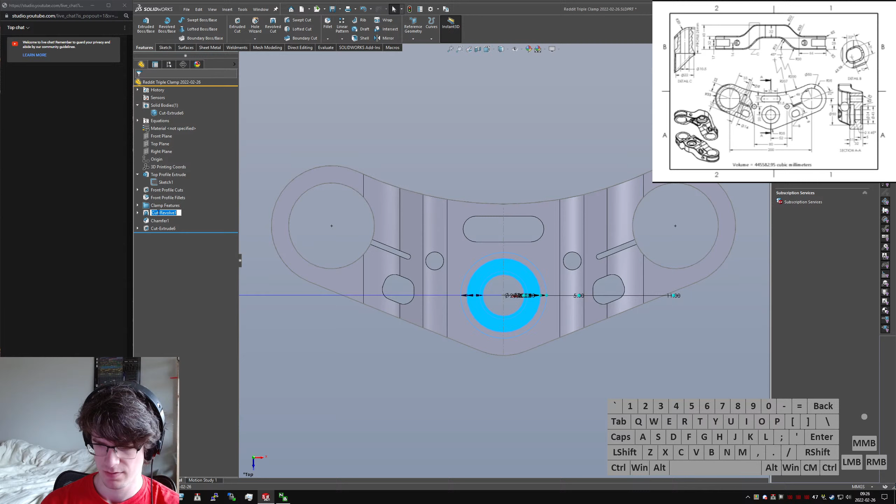Call this the steering hinge? What's the word for that? There's gotta be a word for that. Triple clamp pivot bearing seats.

Backside bearing seat, 2mm backside chamfer. Well, it's just backside chamfer, it doesn't have to specify 2mm in the feature name. And this is top weight saving slot cut.

These are center features. Looks pretty close now, I think it's just the fillets on the outside. And these, and in here, which it looks like they might be on both sides, which is gross, and it would be very, very difficult to machine.

So we'll do quick 2, disable tangent propagation, select tangency. I like to do this because it keeps Solidworks from— if you change your geometry and you care about where your fillets are, which I'm realizing now I don't actually, since that's always going to be tangent no matter what I do, so clear that, keep tangent prop on.

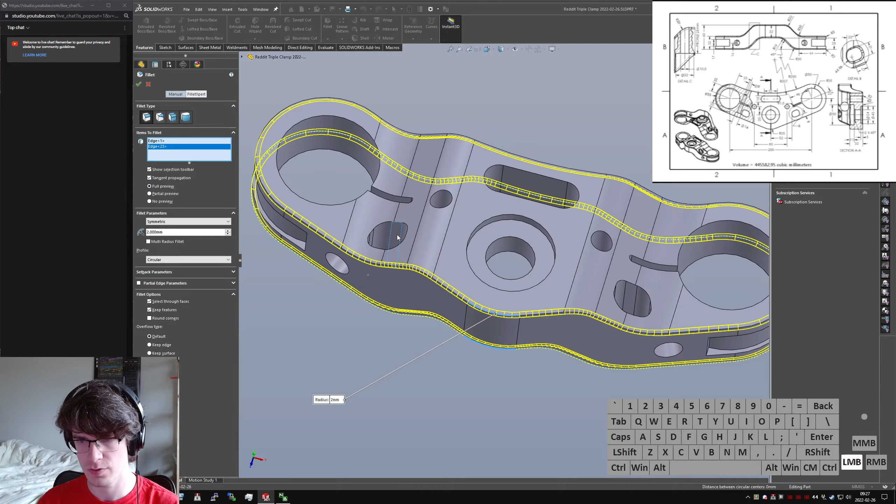Boink, boink, just faster. It could bite me if these change how they're defined, like if that face ceases to exist. Actually, I can just show it too.

Let me open up this feature, edit sketch. If I take this face—first of all it deletes that dimension, a little annoying—but if I replace that edge, and say for some reason it breaks and I need to repair it later on, that's 15mm now.

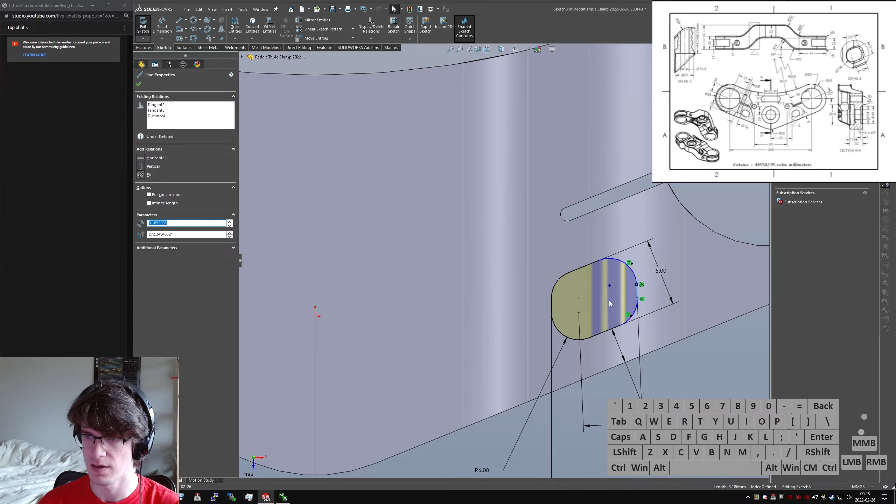Why is this no longer defined? Ah, because it's no longer tangent. Still not defined, why is it not defined? Ah, oh, because that's no longer perpendicular.

Like changing and replacing an edge, you know it breaks a whole bunch of things. But the fillet worked, why did it? I would expect that to break normally. Weird, maybe it got cleverer.

But it's our fillets. I think that's every feature, pretty much. Yeah, I think that's every feature.

So we're looking for 445, 582, 95. Mass props: 447, 334. So I still got some mass to lose somewhere.

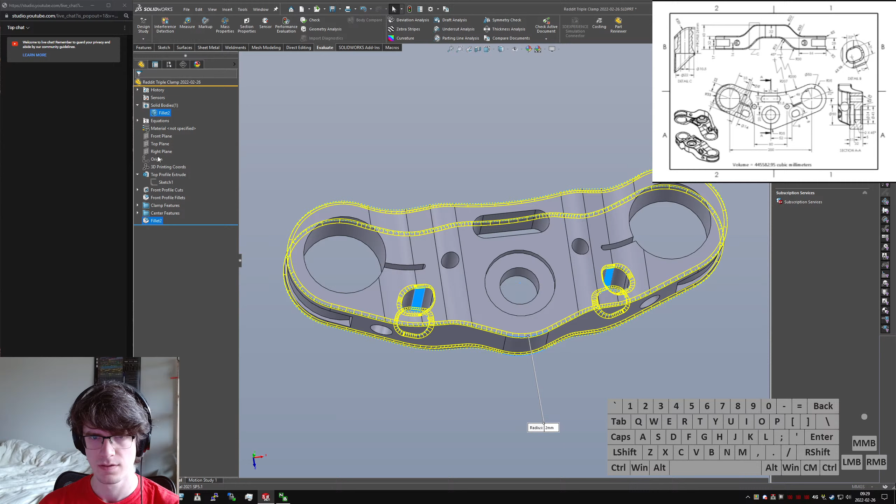What if I... let's see, I'm not missing any chamfers on the top, I don't think. What if I make these chamfers instead? Mass props: 445, 418? Still, now I'm on the low side.

If I take these, or if I take this one down here and say, you're now an equal distance. 445, 418, still the same. Yeah, I don't know.

Don't know where I went wrong. Ah, here we go. No, hang on, that's... is that a chamfer? That's a chamfer on the entry and the exit of that slot.

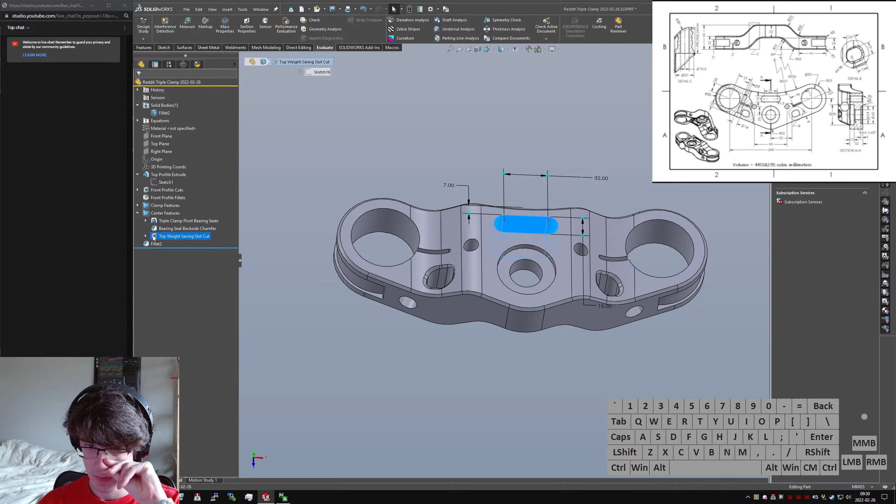So let's move this... center features equal chamfer. Yeah, it says 2, front and back. Oh, and there's a chamfer on the front, too.

But that's going to be losing me mass, not getting me back mass. Yeah, 2 millimeters, 2 millimeters, 2 millimeters, 2 millimeters. Evaluate mass props: 444, 689.

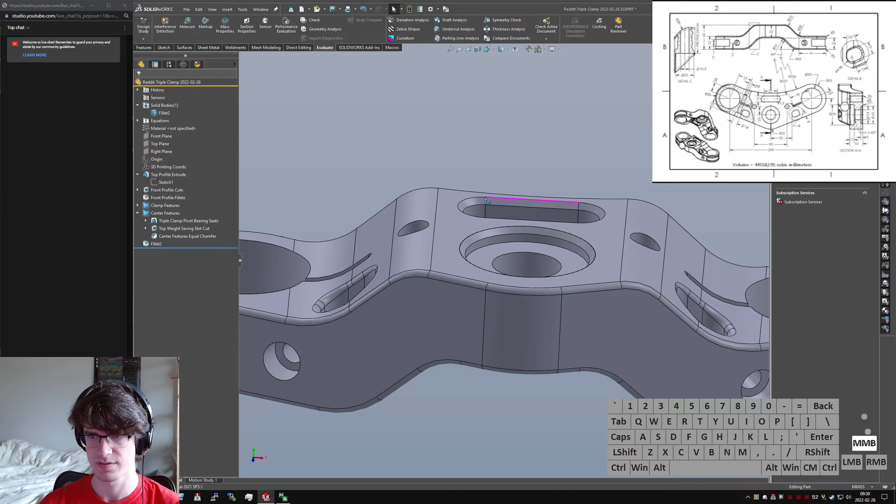Yeah, I think I'm going to chalk up any error in getting this mass right to 446—to the fact that it is not fully defined in the drawing. Like, there are a lot of features in here that are simply...

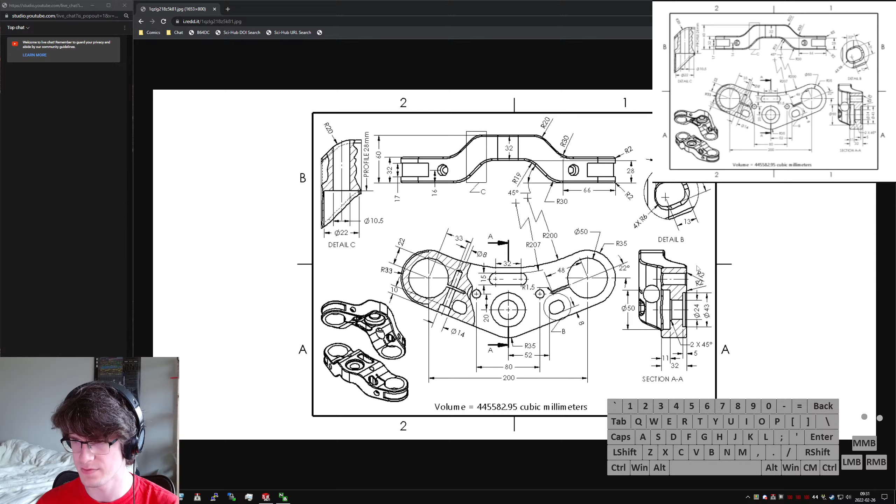Like this, if we zoom way in on this, it just doesn't really look like—it's hard to tell if it's a chamfer or if it's a fillet. This should have been exported as a PDF.

This could have been, if a shop got this drawing, they'd probably send it back. They'd say, hey, we need a better drawing. Totally irrespective of the fact that there's no tolerances or anything on this.

And things like R20, R30, 30, 19. This is called out as 20, but this isn't called out as 19, or that as 30 and 30. I'm assuming that this is supposed to be 32 millimeters thick, but it's never called out anywhere.

The biggest problem that this drawing has is that there's just a lack of clarity. You simply can't zoom in and tell.

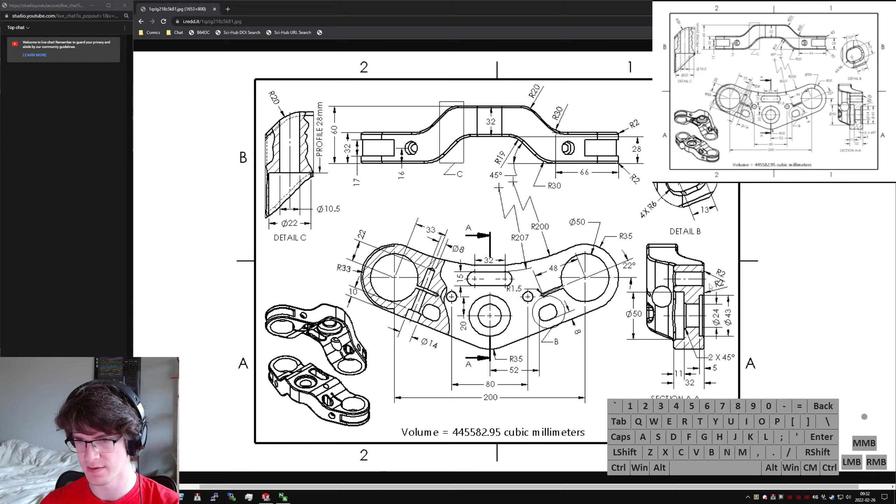In a PDF or a DXF, you'd be able to zoom way in, and because those are formats that are typically exported as vectors by Solidworks or Fusion 360 or whatever this was drawn with, you'd be able to tell that's a chamfer, or that's a chamfer, or a fillet.

They might be fillets. It's a song, They Might Be Giants. I think that's a band.

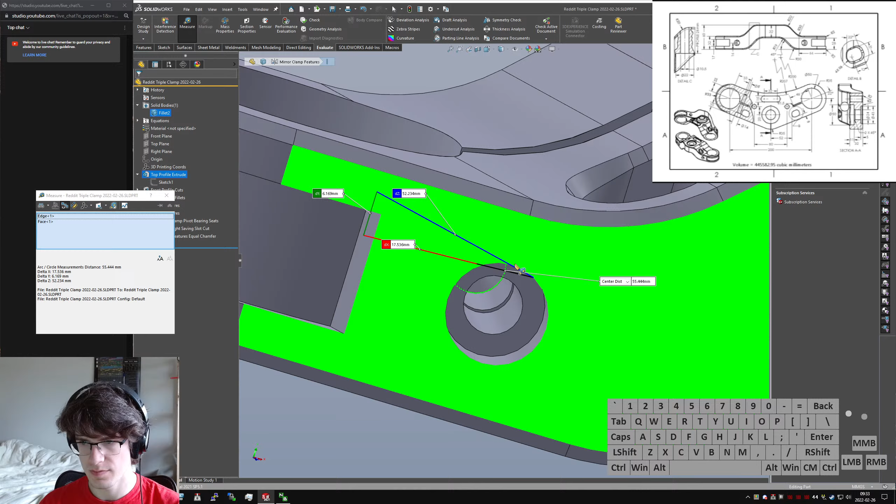Let's see, 22, 35. Actually make that 57 deep. Center distance. Let's go center to center. No, it's 55. Hey, that's wrong. Got to do it from the original one. That's 57.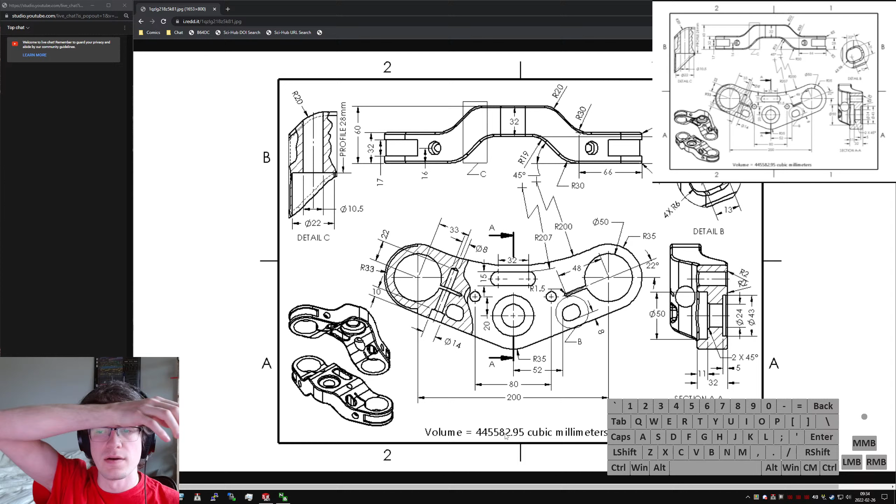Evaluate mass props: 444, 497. Those bores under there aren't chamfered or filleted, and it's not clear if they're chamfered or filleted up here. But that would still lose me mass, and right now I'm trying to gain mass back because I'm still like a whole milliliter under.

66, 66, 32, 32, 32, 45, 20, 19, 19, 20, 30, 30, 30, 30, 48. That was 48, wasn't it? Yep, 48.

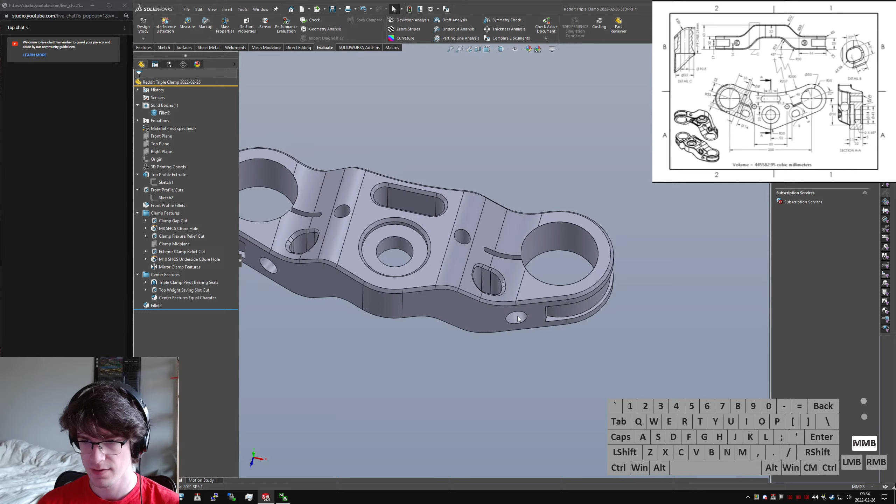1.5, which makes that 3 millimeter gap. Oops, 3 millimeter gap. 14, 10, 57, 8, 16, 33, 15, 13, 8 off the side. Is it 8 off the side? Yeah, 8 off the side.

And a whole bunch of unclear fillets. Exterior major chamfer A. Yeah.

I was really hoping I was going to get it right so I could produce a drawing that would be not only better and more useful, but also accurate to the original volume. But the original drawing is not specific enough to get the actual volume, so it's sort of a moot point.

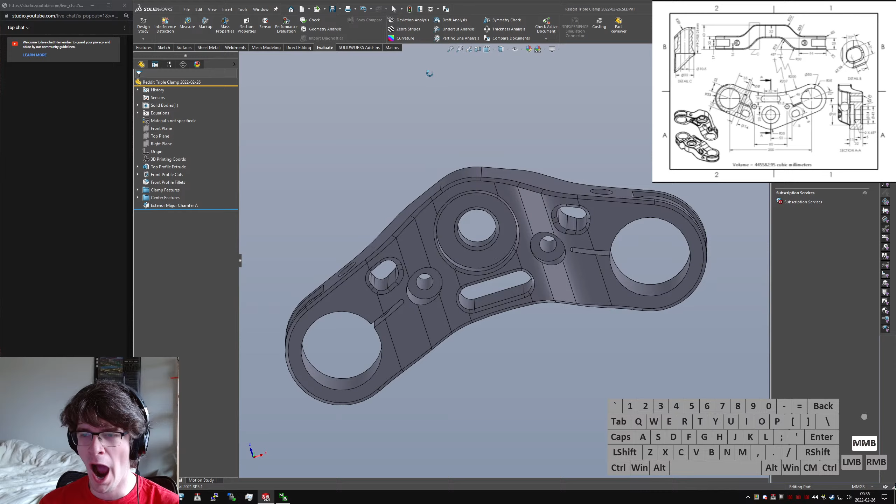What's this here? Is that supposed to be in the center of that face? Yeah, that is. Okay, and it extends either side. Still makes sense.

Yeah, well... yeah, I don't really know what to say. I can't. Well, we're almost at the end of my playlist anyway, so yeah, I don't know what else to say or how else to get to the final volume, but this part ain't it, Chief.

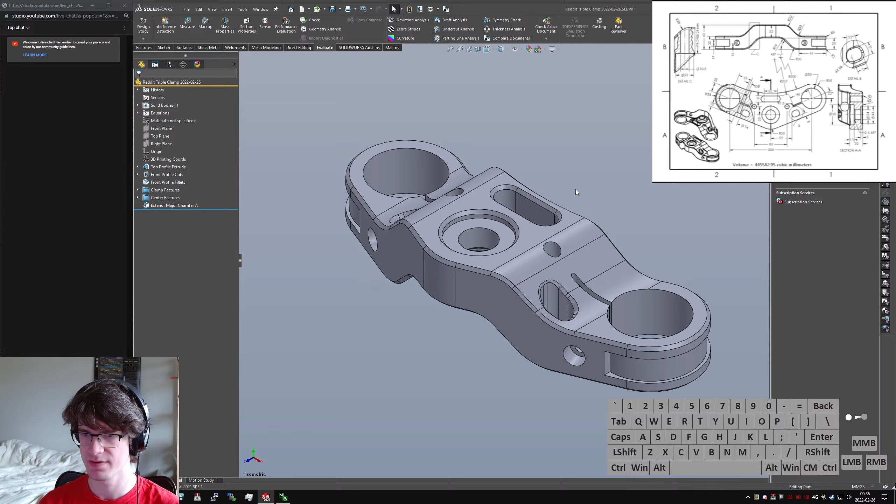Not to mention, if you actually try to clamp down on this. Well, actually, let's see if I can just load in simulation and see what a fixed clamp would do.

Loading in sims. New study. Static, yes please. So, fixtures, fixed geometry up here.

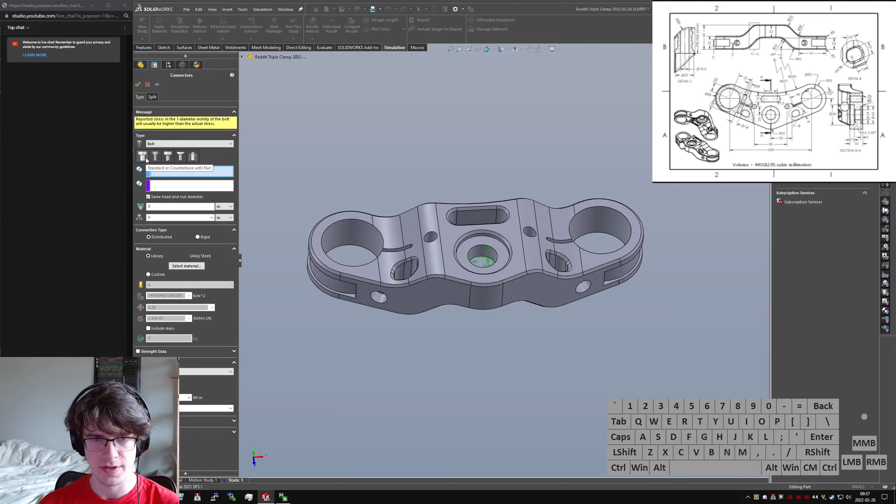External loads. Connections, that's what I want. I want a bolt, and I want a standard or counterbore screw from here down into here. Alloy steel seems fine. Torque.

Why is it giving it to me in pounds, force, inches? Newton meters. Well, this only needs to be like 20 Newton meters, probably.

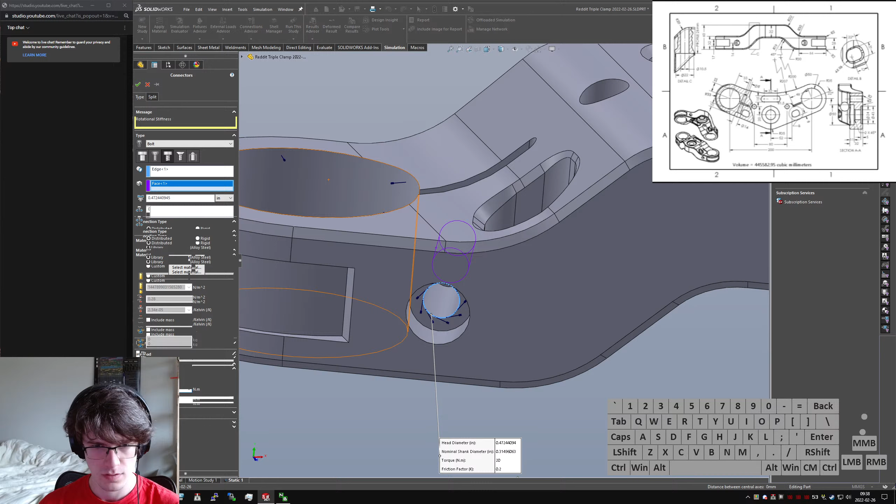Add another bolt. Just add that to the library? I guess I should do that for connectors and things, and just have some standard ones that I can use. That'd be really handy, actually.

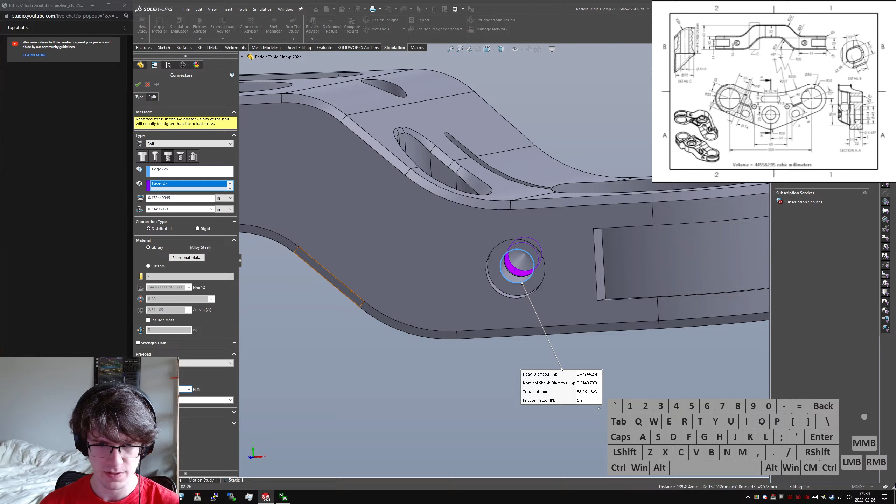Not in pounds, force, inches. Torque should be 20 Newton meters. What? I did select concentric entities. Those are concentric. Oh, it picked an extra face rather than clearing the old one.

Mesh, just do mesh and run. Let's see what happens, I'm curious what SolidWorks will just give... oh, material's not defined, fair. Material 6061. Yep, 6061, run the study.

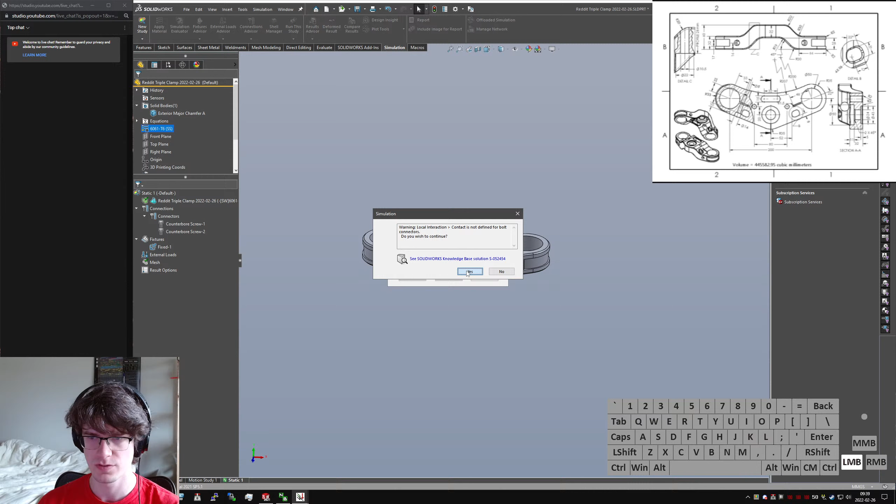It's not defined for bolt connectors. Sure, just let it run, see what it does. Okay, so it says over yield strength, probably under the contact patches, but the deformation's way too big, so let's edit this definition.

Scale the deformation down a little. True scale, user defined like 20x scale is probably, or 10 even, is probably good enough.

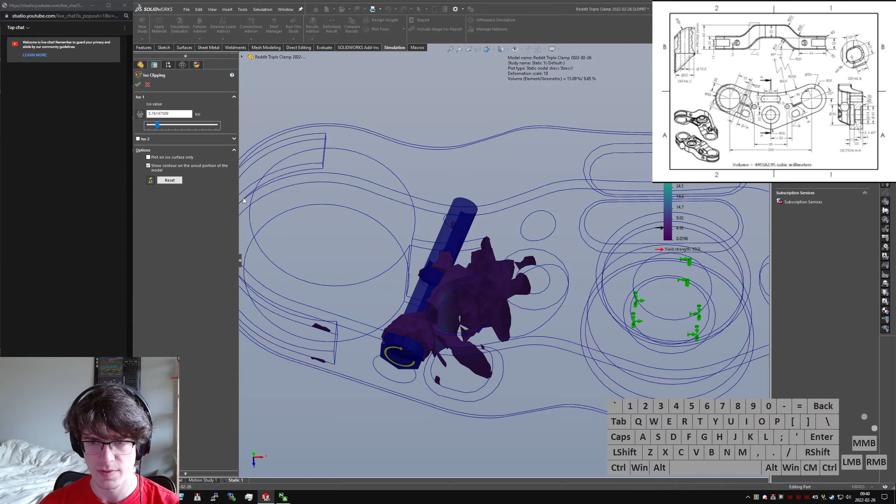ISO clipping. Zoom that out a little bit. Mesh seems a little bit chunky. Looks like it's just right in there that it got messy. Let's do... can I just tell it to show mesh? Oh wow, okay, that's crunchy.

One sec, that ran way too fast. Well, my music ran out, so I'm only going to do this for a bit longer. But I will, at the very least, tell it to do a better mesh.

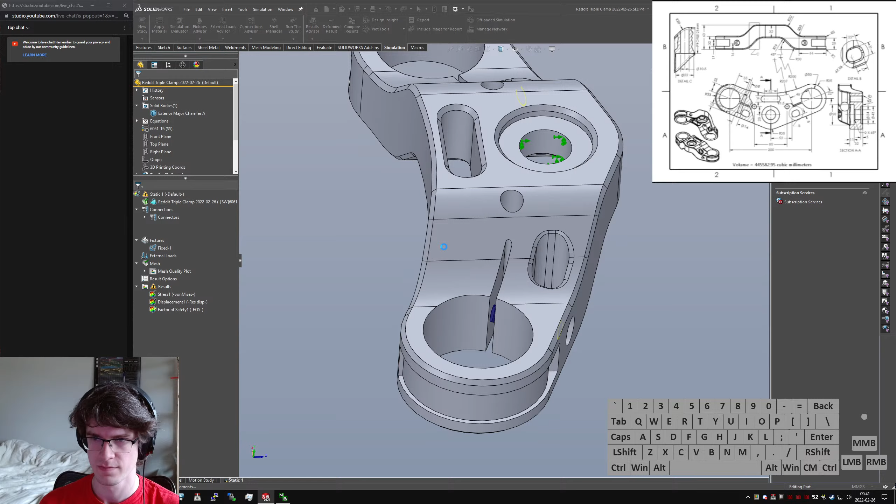Blended curvature based. Reduce. Increase, slow the grow rate. And this will give me a much finer mesh, which is fine. I've got plenty of RAM for something a little bit finer. So now run, mesh and run.

Well, I guess I didn't need to tell it to mesh and run, I could just hit run study. I'm not good at SolidWorks Sim yet, I'm a lot more used to ANSYS. Yes, convergence plots, meow.

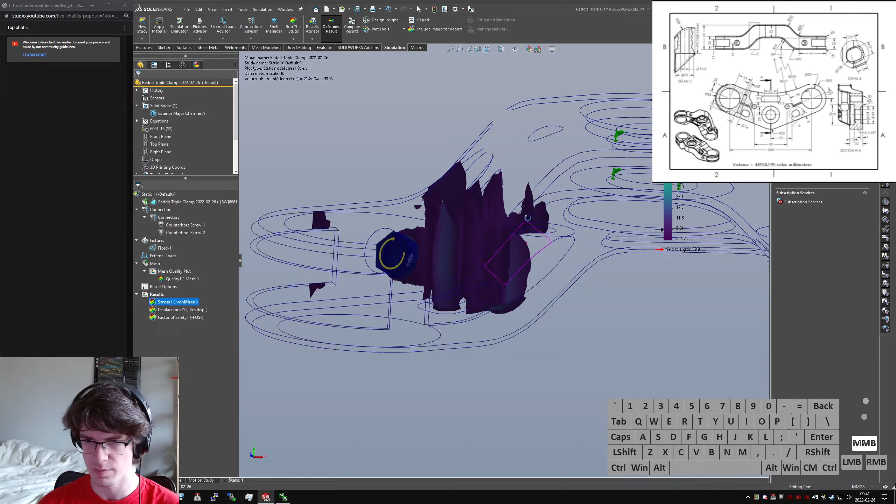I'll shoot right down. Oh, you know what, that isn't actually all that surprising. The highest stress is right there where it doesn't have a lot of material behind it. That counterbore might be too big, or it might need to be moved inboard a little, or even that slot could be reduced.

Let's do a quick check of displacement. No deformed result, please. Only 3 thou inward? That's probably about right. If we go in here with a probe and say what's there, yeah, moving about 3 thou. That would probably be enough to properly clamp a triple clamp.

I wonder if I could tell it to show me... I much prefer ANSYS, like show elements view.

Okay, well, I'm not going to get to a drawing. I'll take that out of the description of the video.